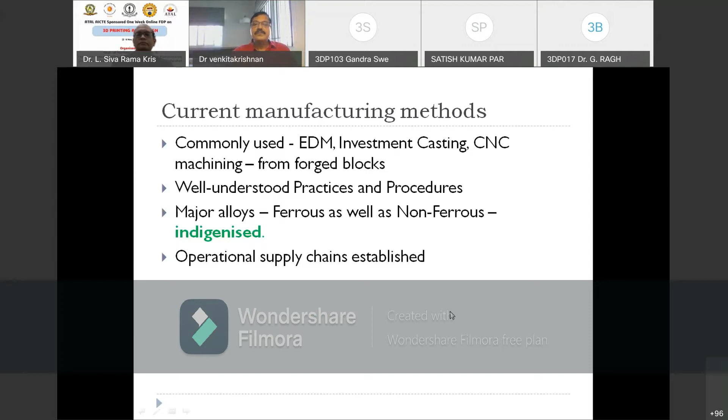3D printing as an alternative can work when it is cost effective without major redesign in an existing well-proven space system. But at the end of the one full day 3D printing workshop, none of them promised me that. I have given the purchase orders and asked what is the end-to-end product cost, what is the forge block cost, what is the machining cost, what is the surface treatment cost, what is the heat treatment cost. I have given them the sum total of all of that.

At the end of the day, the total cumulative cost of one component if you want to replace by 3D printing with imported powder from outside, all put together, and if I want 15 numbers since my launches are only 15 PSLV per year - none of the components repeat in space systems, you must know all of them are unique, only rivets and fasteners repeat - if those 15 components per year are to be made through this route replacing the existing cost-effective method, it must give me a cost advantage or a schedule advantage.

If both are not there, it doesn't become attractive or lucrative for me. So that they were not able to give me. They very clearly told me it is going to be more costly, sir.

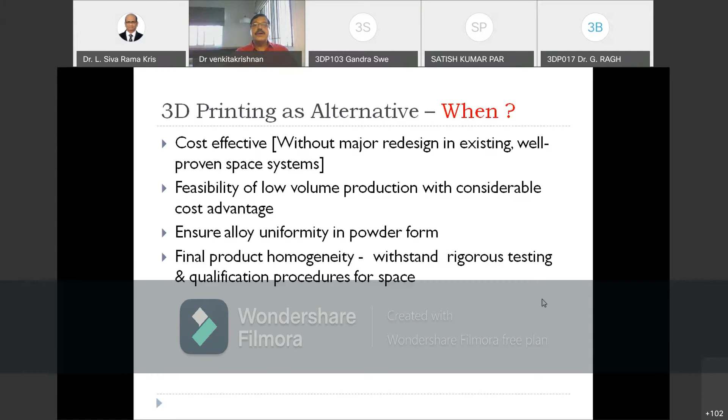Hope it is clear to you. Clear, sir. Yeah, one minute.

So there was a 3D printing summit. The kind of approach we made was the 3D Printing Summit 2018 in collaboration with the Additive Manufacturing Society of India, AMSI, a platform to bridge the gap between required end users, ISRO centers, and solution providers. 3D printing industries met together, shared the platform, and we exchanged our ideas, with participation from all major centers. So whatever is coming out here was discussed that time also, it is just coming to a different audience now. Presentations from select industries were also made.

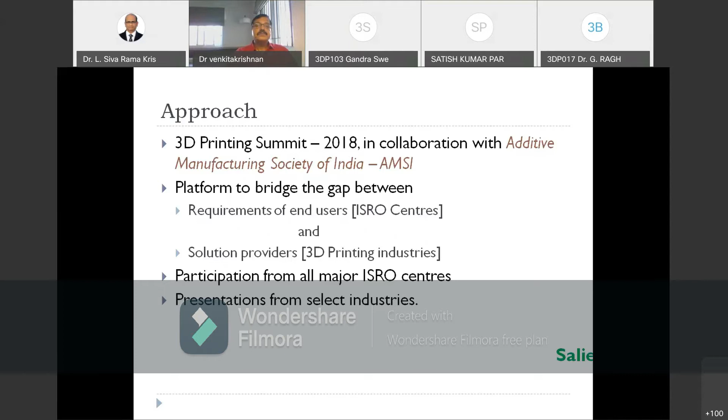This is going to be designed now. What is going to be designed? We thought we'll design for additive manufacturing - also, I am saying it is additive manufacturing also, not additive manufacturing alone. Because if at the end of the day you are proving that the existing methodology of manufacturing is going to be cheaper than 3D printing, we'll stick back to our process only, we will not go into 3D printing. But we have combined some components to make the joints less and more amenable for 3D printing. That way we are manufacturing to see that easy migration to 3D printing is possible.

And we are going to get the quotation for the same components through the existing methods also. We will see how both look like, and only then will we be able to take a call, at the end of the day, on whether we want to go for 3D printing or not. But the exercise is on - unless you do this exercise, I can't give a concrete answer on whether I want to go for this.

Two things are there. One is, whatever is said and done, whether ISRO is using it, or the country is using it, or we are using it, the world is moving towards 3D printing. So at some time, all components will be manufactured through 3D printing only. This is going to be a disruptive technology in the years to come, definitely, I'm telling you.

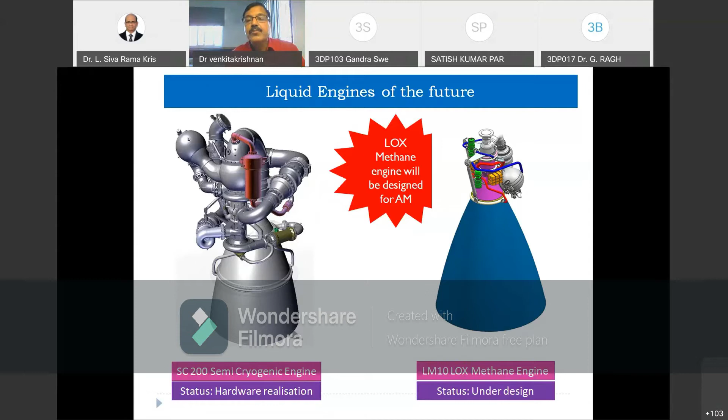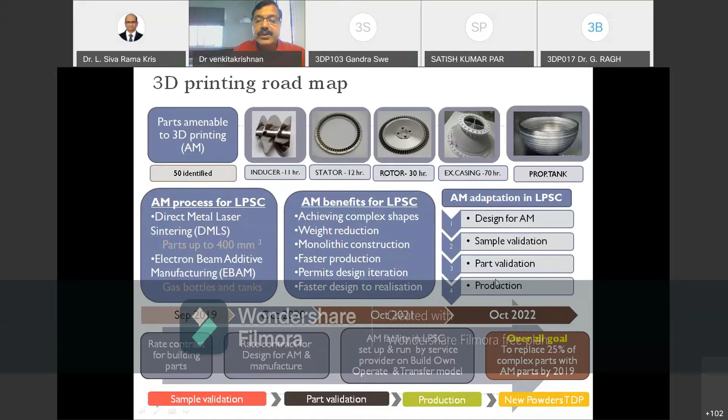One important thing to understand is that migrating to 3D printing for Rolls-Royce engine parts, component parts, or any kind of NASA or ESA parts we see right now - that effort started around 7 to 8 years back. So it's not an overnight changing over to 3D printing. They started 7 or 8 years back, but we are going to start right now only. Hence we will be saving some time because we have the knowledge of what these people have already done, and the kind of literature survey, everything - we have some more knowledge. It may not take 7 years for us; it may take 3 or 4 years from right now. That is the one advantage we are going to get.

But others have already migrated - we are still to migrate. And 3D printing, as I told some time back, is going to be the technology. We have no other option; we have to migrate at some point, if not now, then later. It's aimed to reduce time and cost involved in building rocket engine parts through additive manufacturing. That is the idea. That is the aim.

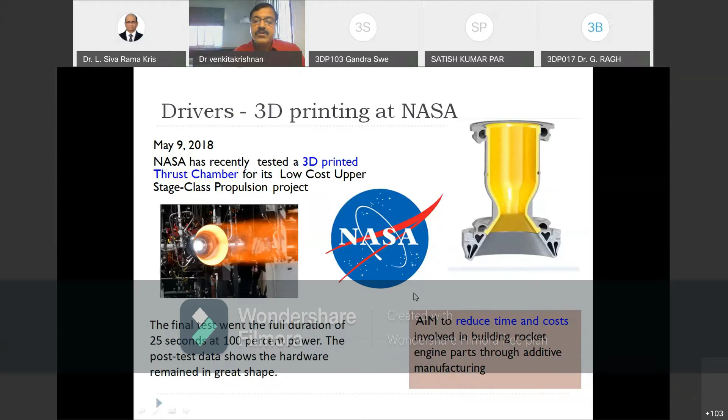For a quarter of the cost of import. You must understand, a quarter of the cost of import, and a product slightly superior to what we are importing. So you must understand the kind of expertise available in the country if you are really able to focus on that. This is a copper, chromium, zirconium, titanium tertiary alloy, which has a high thermal diffusivity. That's why it is being used, because it should not get heated up and melt.

It's the inner chamber. It has 525 convergent helical channels that are milled. That milling alone, if it's a monolithic product, all-welded construction, if somewhere something goes wrong, the entire product gets rejected, even in milling or in welding or brazing. And we have 7 brazing alloys in that with different melting temperatures. You must understand, each one is brazed in a different stage. The last one, if it is brazing, the first one should not melt. So the brazing alloy temperature should be less than that of the already brazed joint. So brazing alloys are to be developed with melting temperatures lower than the previous brazed part.

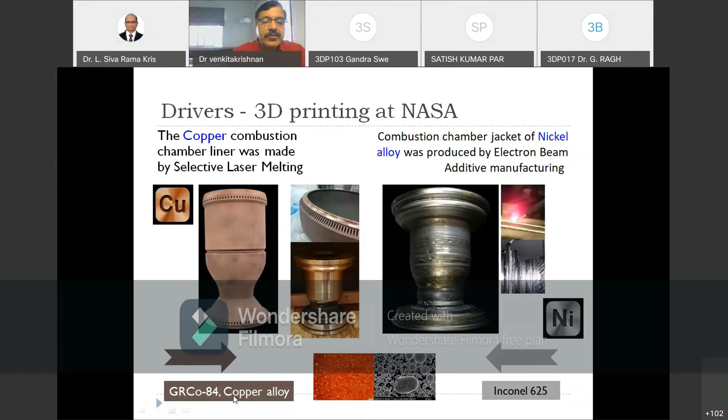Copper combustion chamber liner was made out of selective laser melting for NASA. Combustion chamber jacket of nickel alloy, a super alloy, produced from electron beam manufacturing, and that is Inconel 625, and GRCo84 copper alloy. They have got different copper alloys for this particular thing, and we have got different copper alloys.

The LPSC scenario compared to this is development of a composite thrust chamber for a 20-ton LOX engine that will be a semi-cryo engine as well as the next generation. This eco-friendly LOX methane engine is going to be eco-friendly. It won't contaminate the unburned or unused fuel won't contaminate the sea or anything, even the atmosphere.

The double wall construction has internal copper, whatever we have developed right now, and the outer chamber is 321 steel. 300 helical channels are going to be milled.

The advantage of 3D printing is avoiding milling of the helical channels. You can print it, you don't have to mill it, and it will be more uniform. It also avoids brazing, so the rotary vacuum brazing furnace is not required. And there's a reduction in number of parts also. We can integrate a number of parts because there's no separate outer chamber and inner chamber. If you put it together, it can become a single chamber with a sandwich construction.

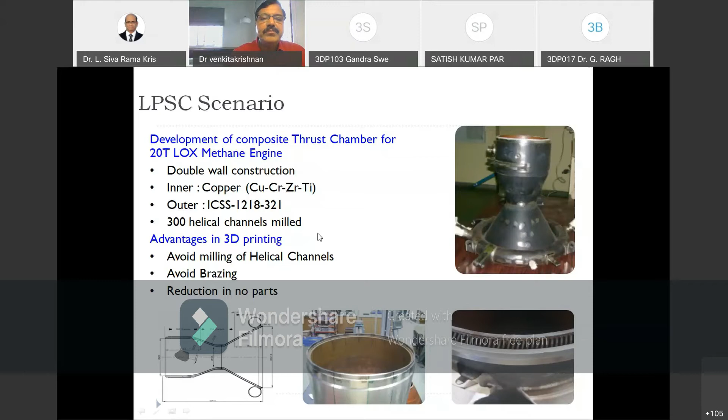The configuration, you have to see it in mind if you really want to follow my lecture. It's a nozzle, convergent-divergent nozzle, with inner and outer chamber. The inner chamber is made of copper.

Both inner and outer chambers are put together, and the combustion products are regeneratively cooled by passing through these channels. When the combustion products come out, the next hydrogen gets heated up by passing regeneratively through the walls of this chamber, so that it becomes preheated. So we are using even the products of combustion efficiently for preheating the next fuel.

In conventional production, 8,000 cross holes are to be drilled. In the LPSC scenario, 3D printing, and Ariane 3D printing—they are doing this right now in Europe, similar to what NASA is doing, and the equivalent is happening in LPSC Trivandrum. If you look at the ESA scenario, European Space Agency's Ariane, conventional production requires 8,000 cross holes to be drilled in copper sleeves, precisely screwed to 122 injector elements.

The injector elements are screwed to 122 elements here—this is called the injector head. It comes through the top of the combustion chamber, and the products of combustion are atomized and burnt there.

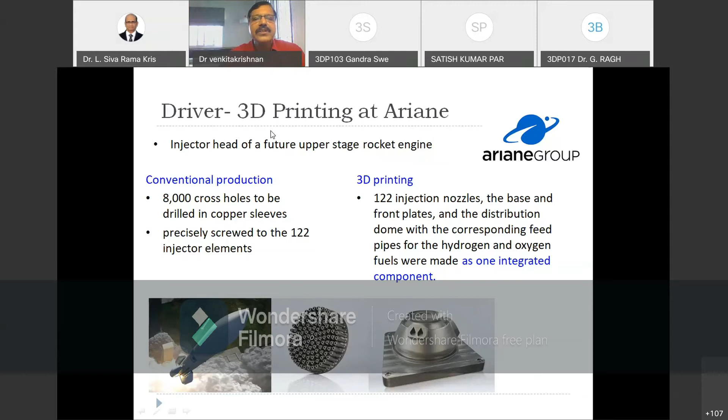3D printing covers 122 injection nozzles, base and front plates. So instead of making each individually and screwing them together, the entire thing becomes a monolithic component, 3D printed right now in the Ariane engine. We have been following exactly what they're doing.

Components cut from 248 to 1—you must understand this. 248 components, because space has a different way of doing things. There's traceability; you need to have a history card available for each component, and each has to be traced separately. Each has an inspection report, a snag report, and there's a non-conformance board available for each non-conformance.

The board has to meet, and the minutes have to be maintained for everything. So 248 components mean 248 reports will be there. You must understand that report making and documentation is equally important in space, and that is a very, very cumbersome affair.

So if you reduce 248 to 1, you need only one report. There's a tangible and intangible benefit when your number of production parts comes down. Your archival history, your volume of archiving, everything comes down, and your history tracing becomes easier.

Conventional production—casting and machining—takes 3 months. With 3D printing using lasers, the time taken will be very less. We don't know exactly how much, Ariane hasn't published that, but it must be less—otherwise they wouldn't go for it.

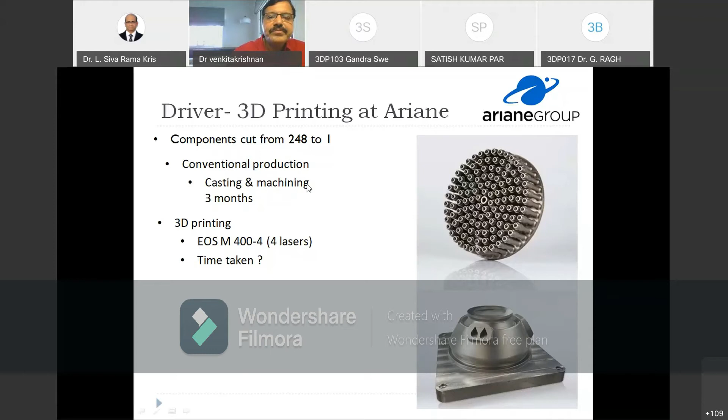In the LPSC scenario we are having, you must see this—these are all injector heads, all injector heads.

It is made by EDM process, electro discharge machining process. It is made of SS. This is an SS manifold, outside manifold internally, and you have braze foils in between this annular space.

You have braze foils here, and the entire thing goes for brazing together. Each one of these injector heads is water calibrated and the efficiency is measured. After that it goes back to the designer, who will reassign this component in the circle again to get maximum efficiency.

So each one, 169, it's only a typical one I have shown here. 169 elements are there actually; one of them is having 530 elements. These 169 you cannot put back again. If all of them are alike only, you can put them anywhere. It is not interchangeable, if it has a different value in water calibration.

Each one of these injector heads has to go for water calibration, come back after water calibration, and then the designer assigns a unique position for each head after the water calibration numbers are made available. So it has to go to a unique position, only then can you trace it. You must know it's a very laborious process. If you make a manual mistake of putting it somewhere else, the efficiency will be less.

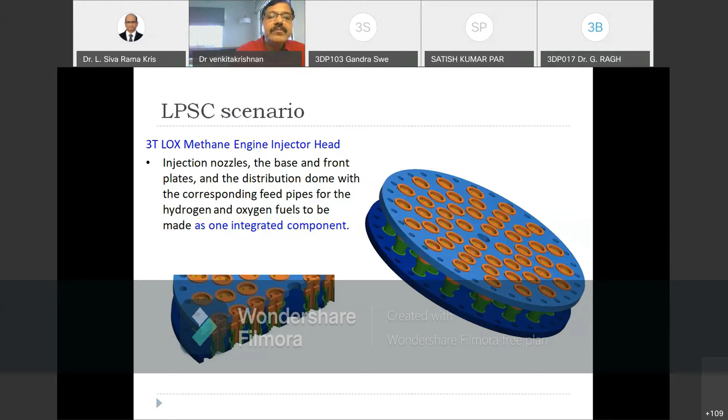At Ariane, what we are doing actually, Prometheus next generation rocket engine launches in 2030. You can see that it is 10 times less costly than the current rocket engine, Vulcain 2. GKN Aerospace Sweden will be developing the manufacturing for the full-scale turbine. They are going for all turbine parts, reducing the number from more than 100 to 2. The 3D printing will reduce the number from more than 100 to 2 numbers, all the turbine parts put together in the Prometheus engine. They are going to next generation engines, like what we are making in our methane engine next generation.

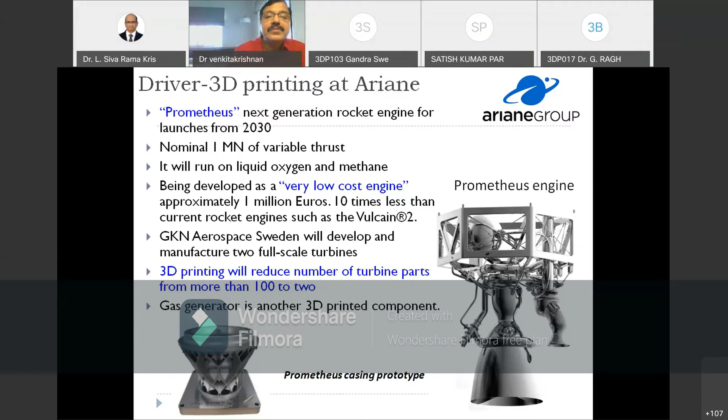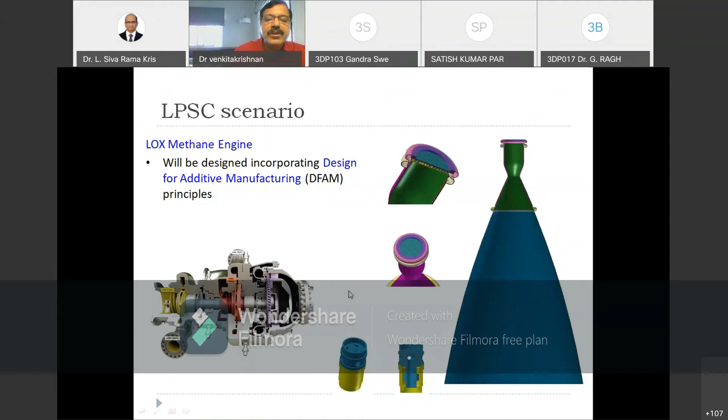The LPSC scenario actually is our methane engine. I'm just comparing here what we are doing right now in the same platform. Design for additive manufacturing, we are right now doing and comparing the parts, actually breaking down the parts, and it's going to be more cost effective to design for 3D printing. The existing engines we are not able to migrate only because they were not designed for 3D printing.

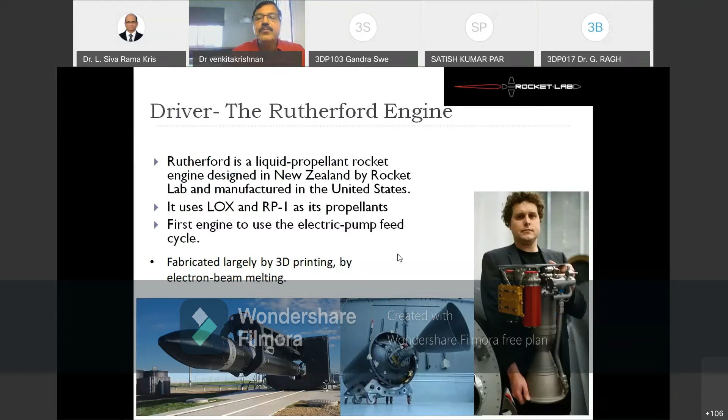The Rutherford engine, a liquid propulsion rocket engine designed in New Zealand by Rocket Lab, is manufactured in the United States. You can see it's fabricated by 3D printing, electron beam melting. This is made by electron beam melting actually. Another slide on the Rutherford engine combustion chamber. Time taken we are not knowing, but there is a considerable time advantage for this, we are told. So the same thing we are following here also.

The engine can be made by 3D printing in 3 days. You must understand, an engine of this complexity, if it can be made in 3 days, there's nothing like that.

The future is going to be like Ola or Uber. We are going to make one SSLV. You are hearing from newspapers and all about small satellite launch vehicles, up to 500 kg. We are going to launch through that particular vehicle because even now for 500 kg or 400 kg we are using PSLV, which is going to be a waste for all of us, because PSLV started from 800 kg and now we have optimized it to 1,800 kg.

A 1,800 kg rocket, if you really want to use it for 800, 400 kg or 500 kg, it's going to be a lot of loss. You may not load much propellant, but the entire hardware, the inert mass, weight, everything unnecessarily is a loss actually. You can optimize it a little more if you want to really carry only 500 kg. So we are going for a different class of vehicle called SSLV right now.

SSLV can be launched in 3 days. The checkout systems go through a laptop, the interface and all these things go through a laptop. Your launch campaign will only be 3 days. If you order today, I want to launch day after tomorrow, we can launch it. That's almost like an Uber or Ola taxi stand. We are just asking for a launch, and you are just obliging that.

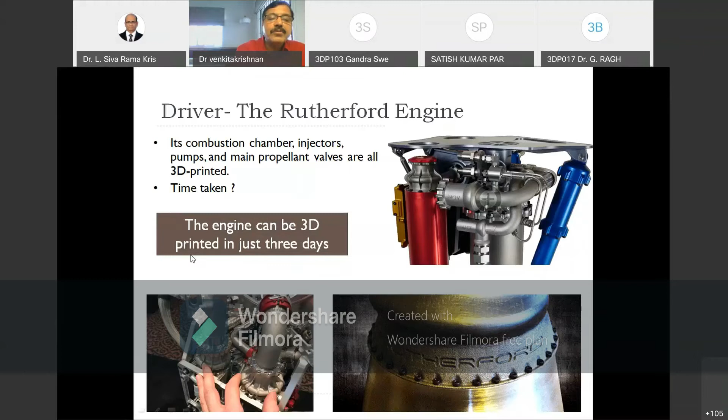Here also you can see the electric pump of the rocket engine will be designed incorporating design for additive manufacturing principles. So these components, a number of components you can see here, are going to be integrated into one.

Different alloys are going to come here, each color is a different alloy. This alloy, whatever we have shown, blue and blue are actually the same alloy. I'm explaining this because these alloys can be made through 3D printing into one integral piece, migrating from one alloy to another alloy. You need not go for separate component production here.

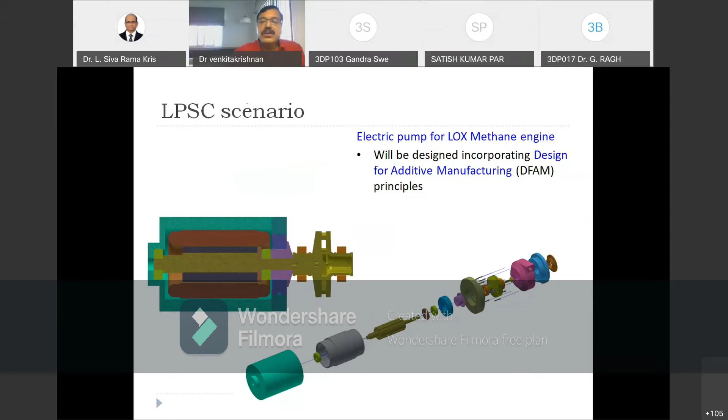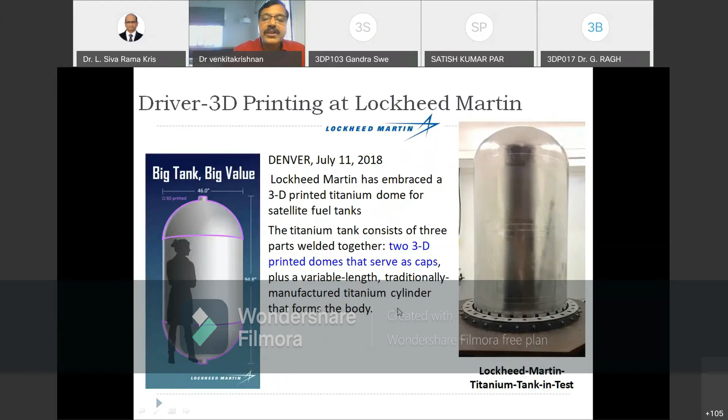Here also a lot of cost advantage and time advantage is there. In this scenario, you have propellant tanks in satellites as well as in rocket engines. Both have a cylindrical section in the middle and domes at the ends, like a hemispherical shell.

This hemispherical shell is made by winding a wire actually. A thin wire of titanium is wound into this shape and is fused and melted through electron beam welding additive manufacturing. This is one technology they have demonstrated here. And this is one where we are trying to make titanium satellite tank domes at LPSC Bangalore.

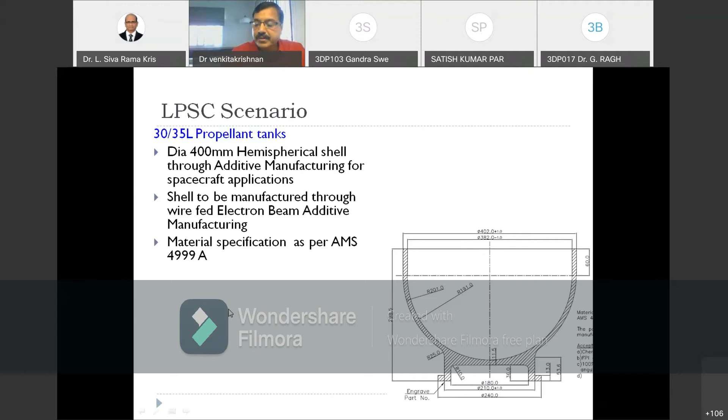You can see 3D printing, the pathway of progress at LPSC, which is the one center where we are mainly making 3D printing efforts. Additive manufacturing journey, you can see: adaptation, technology presentation, AM workshops, printing. We have an elaborate process of migrating.

We can't just do it like that. We make a very, very thorough economic analysis, and also check how strong we are technically.

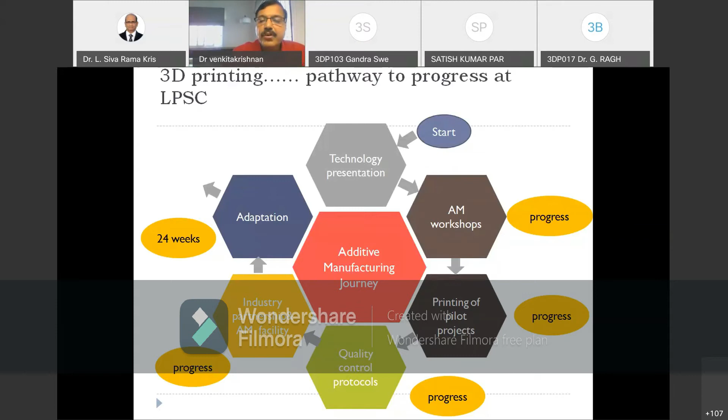So another area where we really have a gap is this: one forged block. If you really want to qualify it, you have to take a small strip as your test coupon, a UTM test coupon, in longitudinal direction, long transverse direction, and short transverse direction, and pull it and see. And you need to do hardness tests and everything. Once it's qualified, any component made out of that block, even 500 components, this one test coupon will qualify all of them.

But independently in 3D printing, if you make 500 components, how do you qualify like that? Just one forged block qualification qualifies 500 products made out of it in the existing system - that's the kind of practice we follow. But right now, if you make each component separately, what kind of qualification applies? Unless you qualify the process itself, with all the process variables, it won't work.

So that's going to be a real challenge, migrating from product qualification to process qualification. Here, we depend more on process uniformity and process qualification than product qualification. That is a philosophical change for ISRO, and that's one thing I want to highlight here.

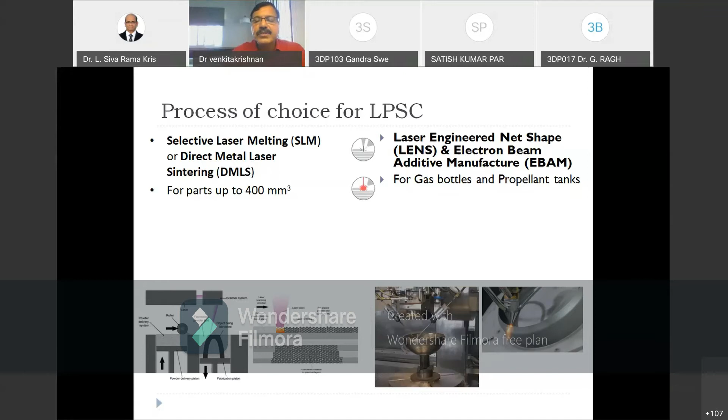So selective laser melting, or direct metal laser sintering process, parts up to 400 millimeter cube, we are going for that. And electron beam additive manufacturing for gas bottles and propellant tanks. These are the two technologies we have decided to go ahead with, with a minimum possible target of 25%, as I mentioned - by 2022, 25% of products will be replaced by 3D printing if it is economically viable. And for typical parts, 3D printing time - building time is 30 hours for a rotor, which was previously made using EDM, electrical discharge machining.

It takes almost 1.5 months in one EDM machine. Now it will be done in 30 hours. But we don't want that at this stage. Actually, we want only 12 numbers per year. That is another challenge - if you want 1,000 numbers made in no time, 30 hours is going to be really painful.

The question asked to me when I present this proposal tomorrow is, why do you want this so fast? I don't want it this fast. That is another challenge I'm having. I want only one in a month.

So existing technology is enough for me, unless we get into more launches in the years to come. So we have to project a scenario where we are going to make more numbers in the future, futuristic - that is one thing.

Second, as I told some time back, if 3D printing is going to be the technology and all other technology is going to be wiped out, we should not be lagging behind in not having the technology. For that, we should be having the technology. At least some parts we have to continuously produce through 3D printing to stay alive in this area in the years to come, so that at the right point of time, if no other technology is available and we are forced to migrate, we should not lose time and should be able to migrate. So those are the two policies we are following.

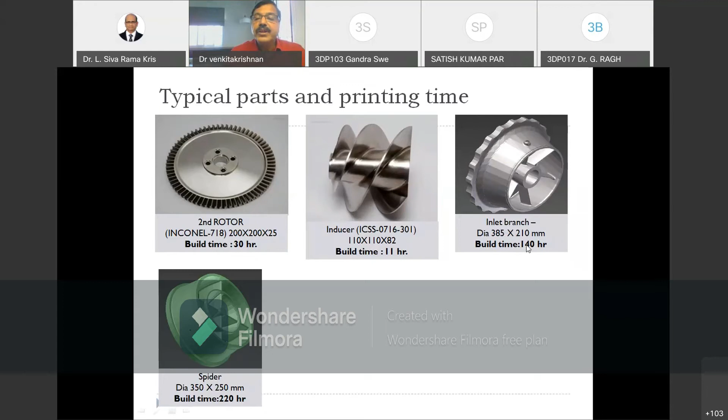The inlet branch time is 140 hours here. Spider is another 220 hours. This exhaust casing is done by investment casting as well as interface machining - I've seen this already. Now it will be done in 70 hours - that's the build-up time.

So this is a stator. This has an outer casing also - without the outer casing I showed something similar earlier. With the outer casing, if you want to EDM this, you have to flip it and do it through another cathode from the other side, a copper cathode.

So two copper cathodes are required - one from this side, since you can't make it through. You have to make it again and align it to the next side. If you want to flip it, again you have to align it properly. That is another technology actually, but we have mastered it right now and we are doing it.

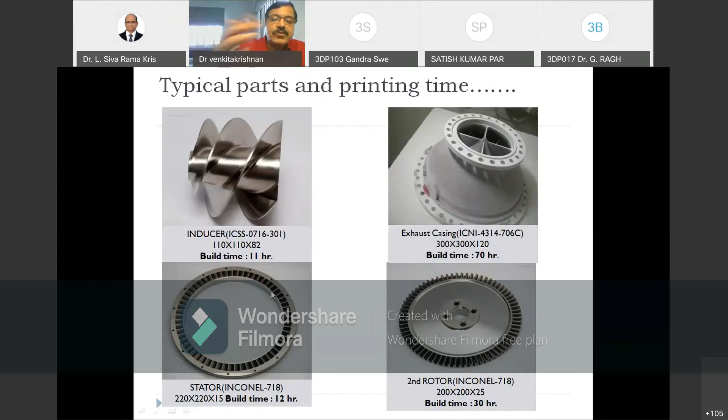But in 3D printing, you can do it without any problem of aligning cathodes from both sides and all these things. If it is open like this, you can approach from the side and do it faster. If it's closed like this, you have to approach from both sides - that is another thing we currently face, but we have mastered the technology.

Flow straightener, impeller - these are among the 50 typical products we identified which we are trying to migrate into 3D printing. The structural parts right now, like thrust frame support and thrust frame, whatever - these are all structural components. We can easily migrate these because they are functional parts with no flow, no pressure vessel, no rotation, no RPM. So these are static parts which we can easily migrate.

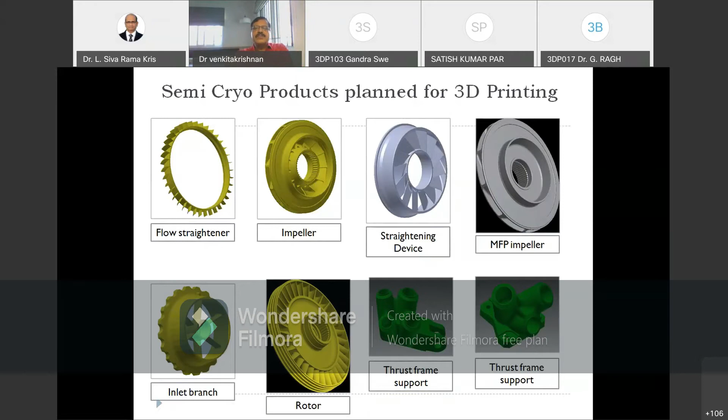These are typical investment castings. This is the second stage volute body for a cryogenic engine. ICSS means Indian Cryogenic Stage Steel - 1418-201-C - these are all made in Midhani, Hyderabad. This is investment casting with the interface area machined. The interior has highly intricate pockets internally, so all these things are easily amenable for 3D printing.

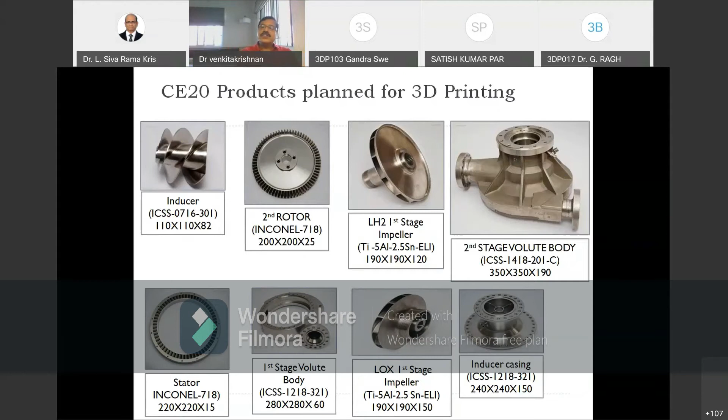You can see that here. Obstructing my view, actually. That's what. Okay.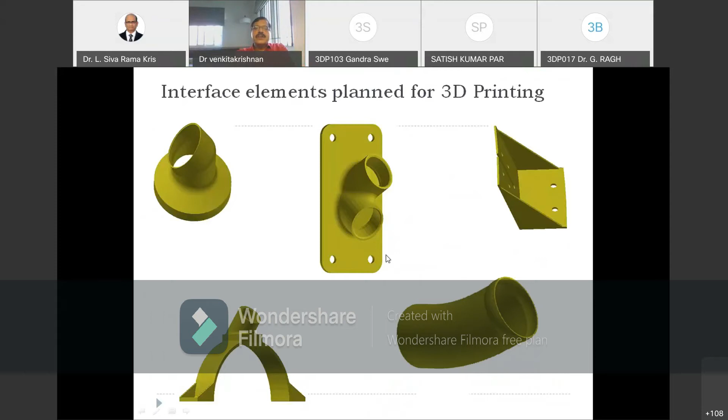These are all typical structural elements easily made for 3D printing. We already have 3D printing for this - it doesn't make sense otherwise. These are all sheet metal products flared and welded, so we are easily going for 3D printing right now. But engine component 3D printing will take more time, as I mentioned earlier.

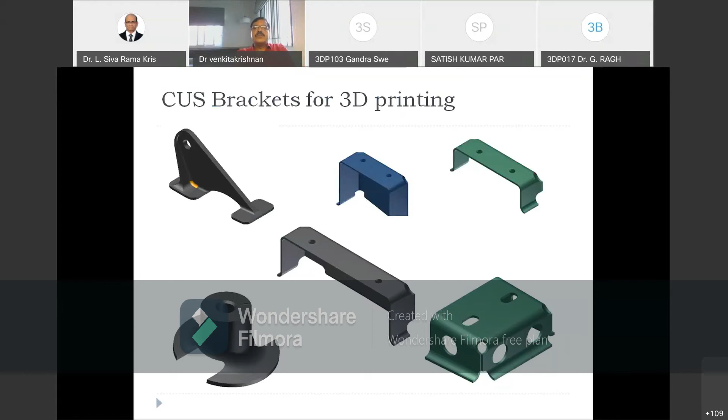CUS brackets for 3D printing. CUS - this is cryogenic upper stage - called CUS, cryogenic upper stage brackets for 3D printing. Semi-cryogenic engine 3D printed parts - typically what we are going for with 3D printing. These are all typical parts easily made for 3D printing. Satellite thrusters - you can see satellite thrusters here.

New powder development is required for niobium - C108, columbium. Right now we are making it through NFC Hyderabad. We got a columbium plant, the niobium-columbium plant, just now introduced, indigenized two years back. And if you really want to make a new powder development for 108, it's going to take another 10 years.

This withstands 1,800 degrees centigrade, and it's a highly thermal resistant material. Thermal barrier coating is not required inside this. It's called columbium and niobium.

And if you really want to make powder for this alloy and don't want to import it, it's going to take another 10 years from now. So this technology sometimes, if it involves all exotic alloys, sets me back by 10 years. You must understand - sometimes it sets me back by 10 years more.

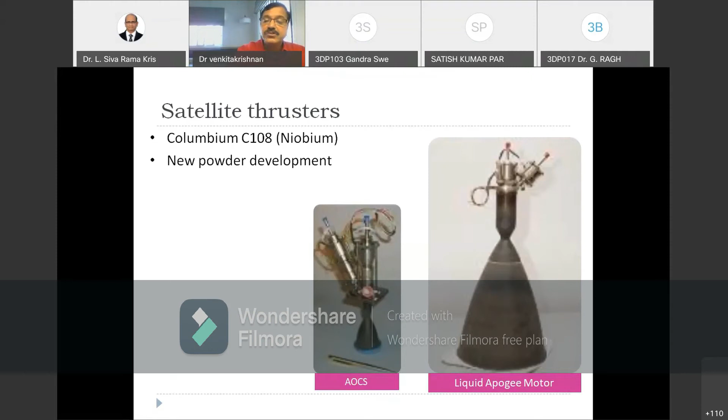If you're really talking about Atmanirbhar Bharat, self-reliance - if you're importing, of course not. But we have been importing for quite a long time. Atmanirbhar and self-reliance - ISRO actually started this long back, before all these words were coined. 10, 15 years back we have been working for self-reliance without anybody's encouragement. It's now become policy, because with high-end technology, at any point people may say tomorrow I won't give it. So it should not come to a standstill, and your technology should not be taken for a ride. You should be able to launch your satellites and rockets regardless. So you must be Atmanirbhar or self-reliant, even at a higher cost. That has been ISRO's policy over the past so many years.

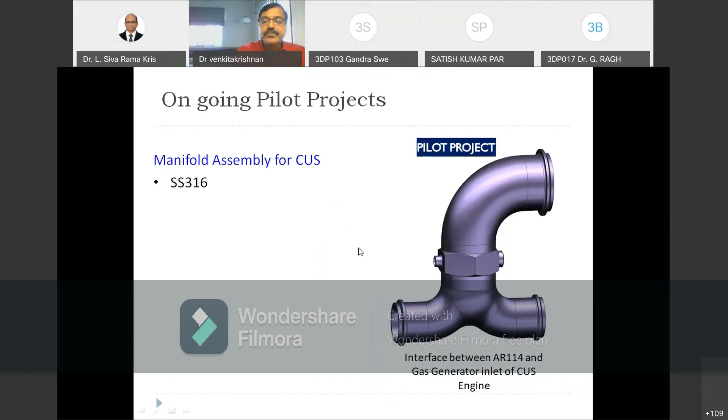Manifold assembly - this is another 3D printing pilot project already done through Wipro. Semi-cryogenic, uses Inconel 718, a highly hard super alloy. This also we have made as a pilot ongoing project.

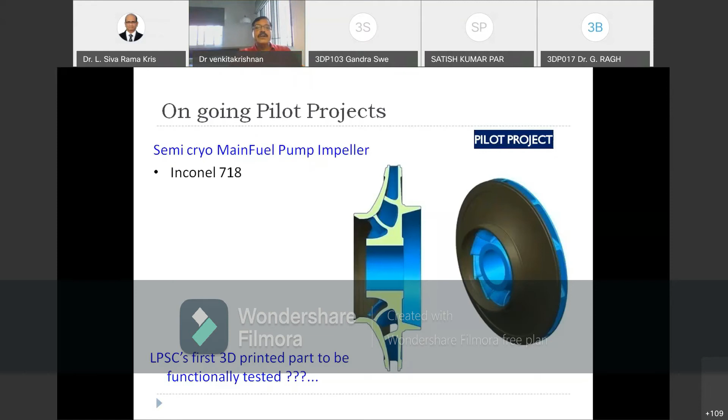The alloy comes from KMML, titanium sponge comes from Kerala Minerals and Metals, from beach sand. Titanium dioxide - they reduce the beach sand to titanium sponge. Titanium sponge goes to Midhani and they convert it to Ti-6Al-4V, making the alloy. After that it goes to Visakhapatnam, to BHPV - earlier BHPV, now BHEL has taken over.

The plate is given there, and it's made into a kind of semi-dome through dome processing. The dome comes again to Trivandrum for BrahMos, for dome machining. Then the entire thing goes to BHEL Ranipet for making the tank. For electron beam welding, it comes again to Bangalore LPSC. Then pressure testing goes to Trivandrum and Mahendragiri. So this is how a tank is being made right now.

The entire South India, almost from Visakhapatnam to Bombay - or if it's not the plate route, for the forge route it goes to Bharat Forge, Pune. So the entire southern India, below the Vindhyas, is involved in making just a small tank.

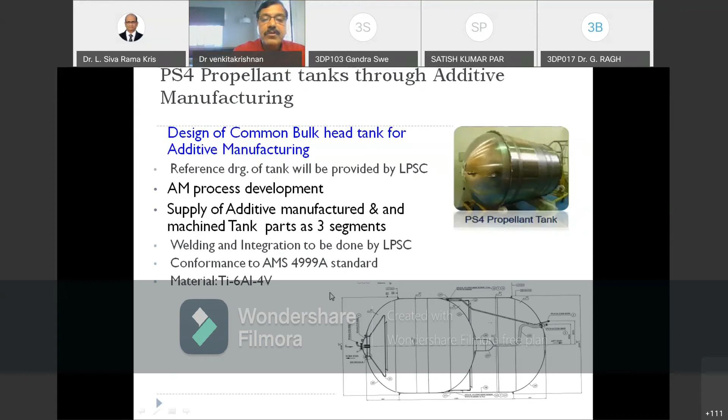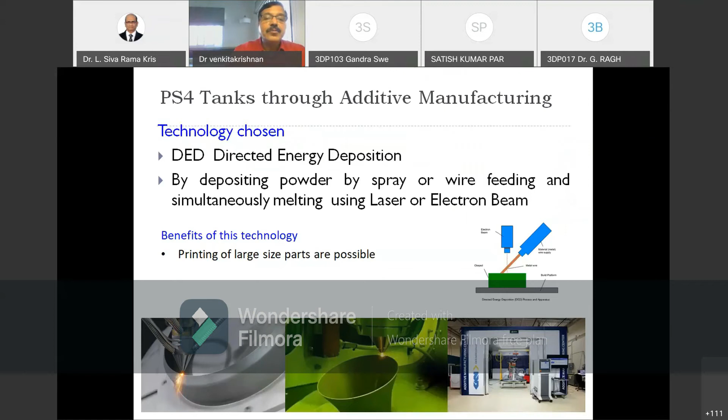That is one important challenge which we are posing for all people working in the 3D printing area, if you really want to contribute to the space segment. PS4 tanks through additive manufacturing. Actually, directed energy deposition method is one method we are really going to follow. And powder development for the future.

So these many powders are to be developed, minimum, if you want to make columbium C108, copper alloy, CU nickel alloy, C273 titanium alloy BT5, TI6Al4V, TA 2.5 and 2. That also alpha alloy, also alpha beta alloy, also you have to make. Nickel alloys - these are all Russian alloys actually. Stainless steel, 321, 304, 316L.

Everything we have to make right now, space quality. That all - space quality, you must understand, these are not commercial quality. Space quality means the oxygen content will be less, the gas content will be less, the porosity will be less. All will be very strict. The AMS standard we are following for space is totally one order higher than the commercial products.

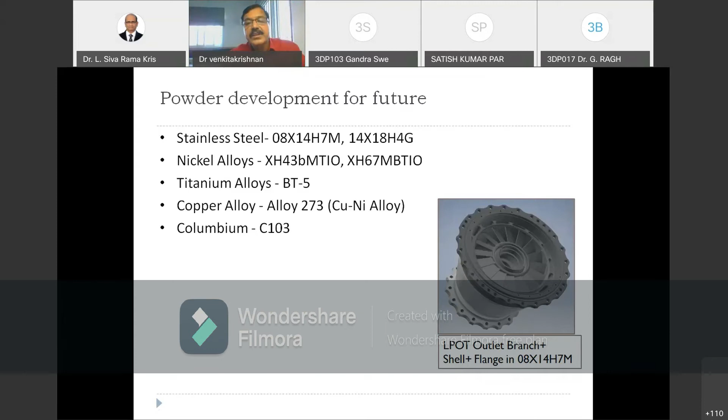Spacecraft component subsystems what we are following in SAC Ahmedabad, Satellite Application Center Ahmedabad. Some of the components we are 3D printing, I'm just sharing with you here. So materials like 6061, B51 SWP, 2024, magnesium alloys like AZ31B H24, 6Al4V, 300-400 series of steel, beryllium copper alloy, non-ferrous like FRP, fiber reinforced plastic, PTFE, and Delrin and nylon, etc. All can be 3D printed.

This center, you must understand, 90-95% of material is removed right now through CNC or wire EDM method. Right now, the way in which you produce, there's a lot of waste of material happening. To produce 10 grams of small components, we'll be wasting around at least 300 grams of forging to see that it is being made. The scrap cannot be used for anything else - it is a waste actually. The machines have to be 3-axis, 5-axis, and it's going to be highly costly.

So if you go for 3D printing, we can save a lot of material, that need to be cataloged and counted so that only then can we prove it is more economical.

Dimensional accuracies are generally 5 - you must understand even forged parts or even formed parts like sheet metal parts, we also require 5 micron, 50 micron accuracy. Very difficult to get sheet metal accuracy for 5 microns, 10 microns. We are looking for that. And surface finish is 0.5 to 3.2 microns. This is another challenge which we are really posing for 3D printing.

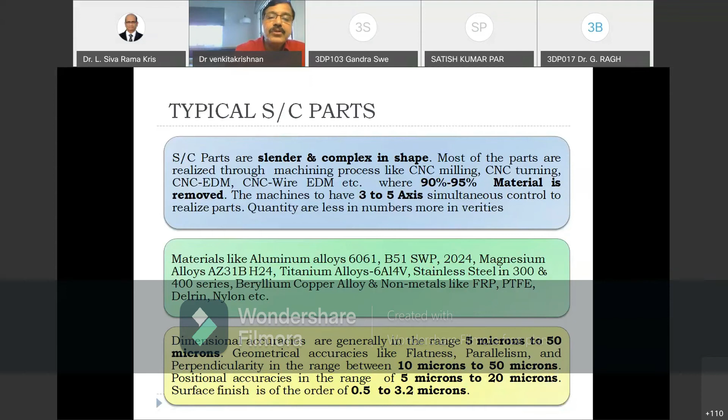So avoiding CNC machining in the final phase, if it is possible in 3D printing, and if you're able to get an accurate product by 3D printing alone, that is going to be really a kind of boost for me. Otherwise, no, the CNC machining I'm not able to avoid. So these are the things which you really look into when you want to create this. Final machining is still there.

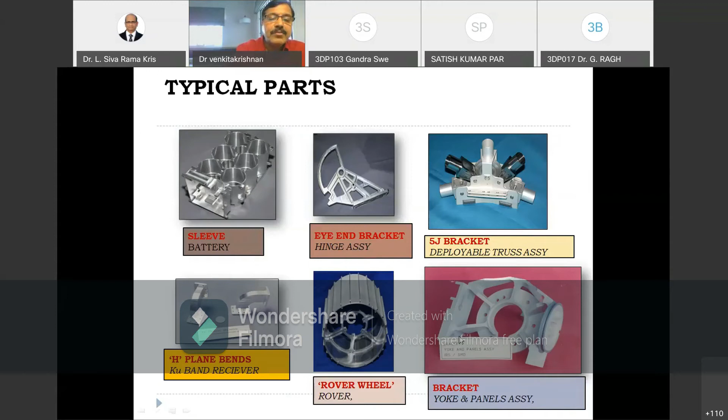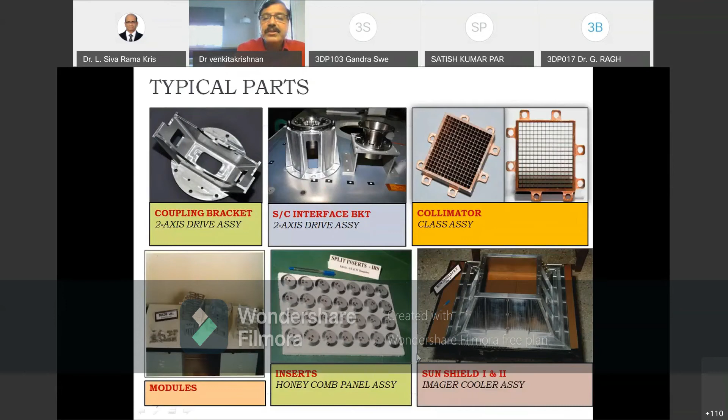Honeycomb panel assembly - these are typical parts. You can see here additive manufacturing from component rapid manufacturing and rapid prototyping from concept modeling has evolved into additive manufacturing right now as a technology.

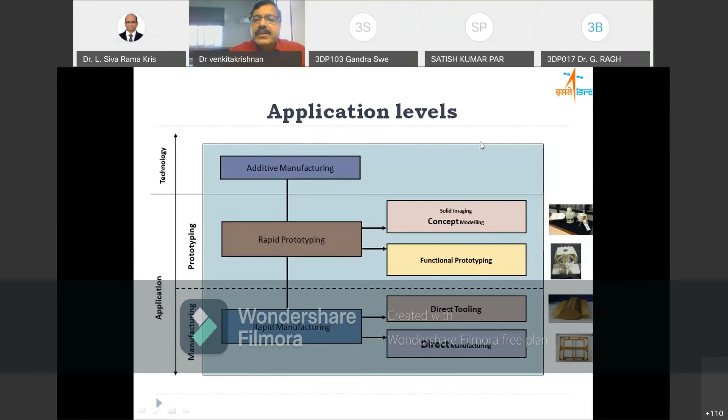This is not a new technology. Sometime back, Boolean algebra - if you want to construct solid geometry from circles and other shapes, that's a kind of additive, and the other one is subtractive. What we are really doing is subtractive. So the reference taken is totally different, even in the machine. The entire thing is a totally different product - even design concepts are different, in your FEM analysis, everything.

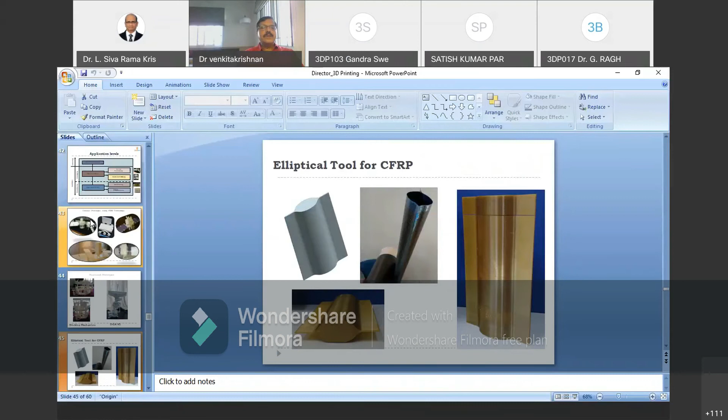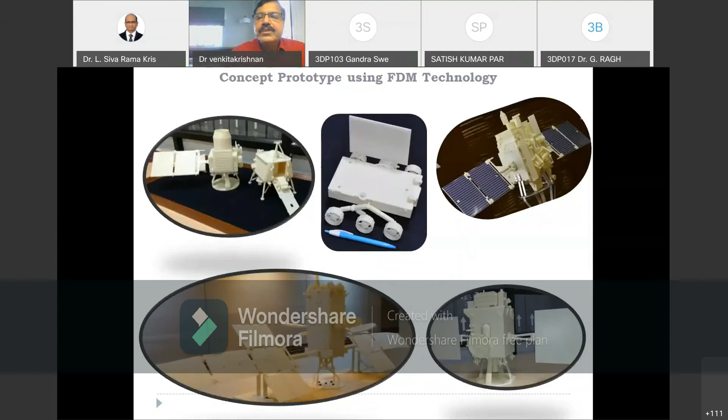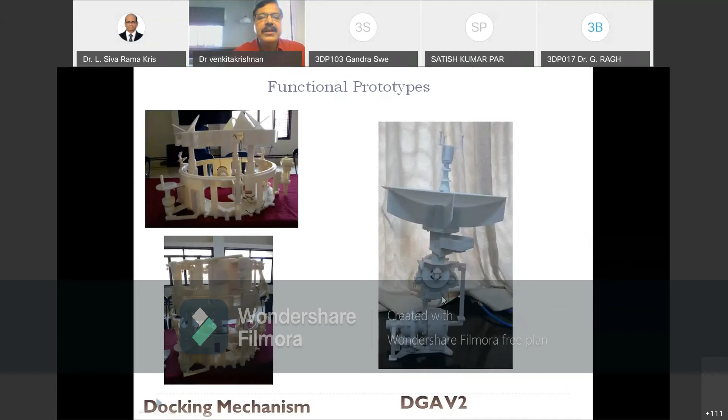Concept prototype using fused deposition modelling technology. We are producing some components - these are also satellite components, and future functional prototypes right now. They're all again 3D printing functional prototypes by some other mechanism, then finally migrate to actual metal. What we really do here is prove the configuration first, and then go for the actual product.

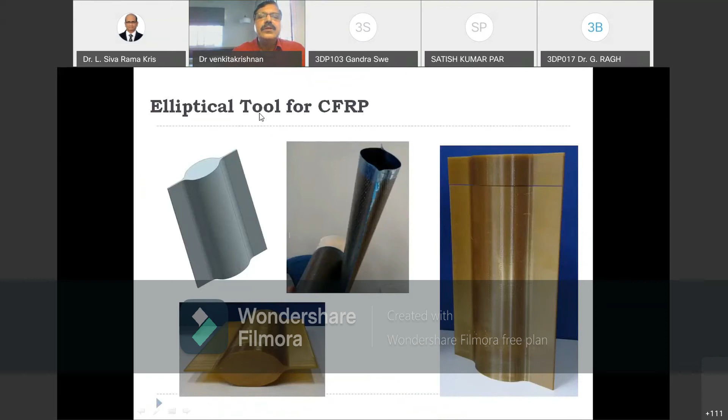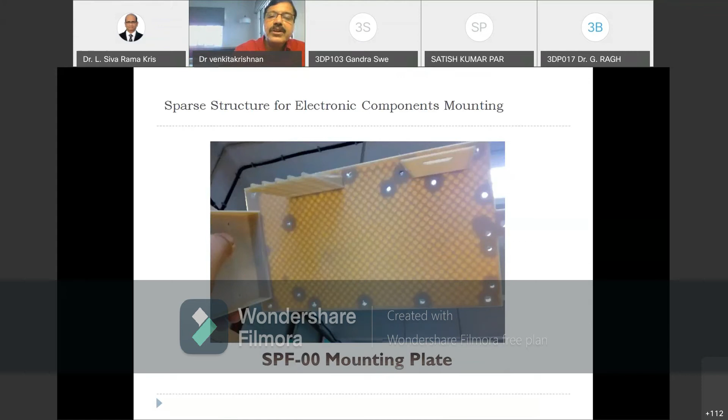Elliptical tool for CFRP components, SPF mounting plates for electronic components. This also can be 3D printed, otherwise you have to go for a big machine and machine it out. 3D printing is an option, but big machining is still required in some cases - the size of the machine is not going to come down. But you require a typical tailor-made 3D printing machine for this also.

AM for insulation using ULTEM thermoplastic material 9085. Here also we are using 3D printing, with some other non-metallic materials also. Validation of ULTEM has been completed by 3D printing already in SAC.

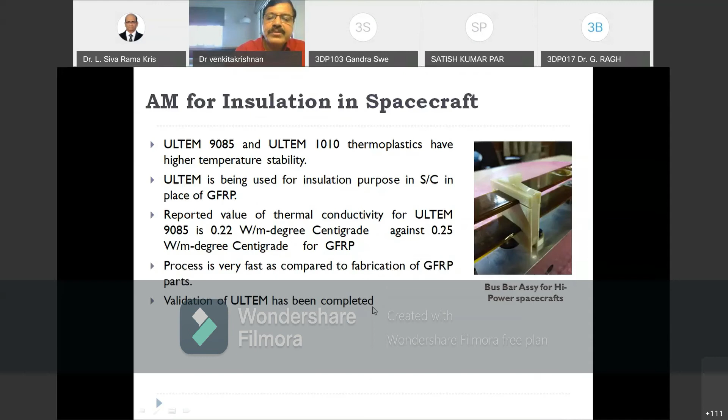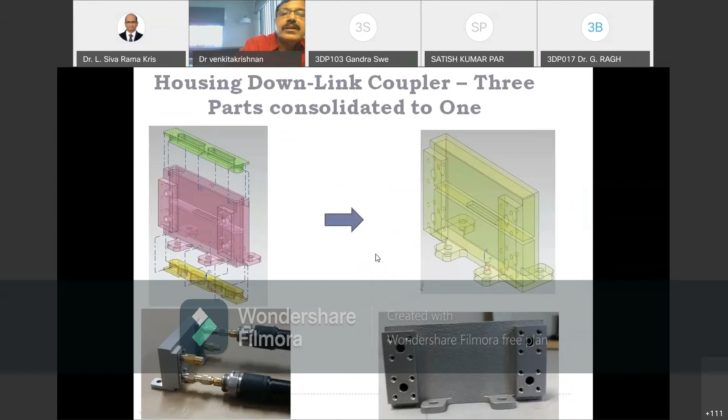Proposed payload is 17 parts consolidated to 2 parts. This is the advantage we are going to get - this is designed for AM. Housing down link coupler, 3 parts consolidated to 1.

Space payloads - communication payloads, navigation payload, remote sensing payload. Three types of payloads are there for three types of applications, including microwave remote sensing payloads. Here also we are finding some application of 3D printing.

The design approach versus fabrication. You can see the kind of mechanical design and fabrication done in short time with minimum weight, design intricacy, compact simple configuration, stiffness, strength, design for manufacturing, ease of fabrication, thermal management - all these are the other factors which don't come into play in other component manufacturing.

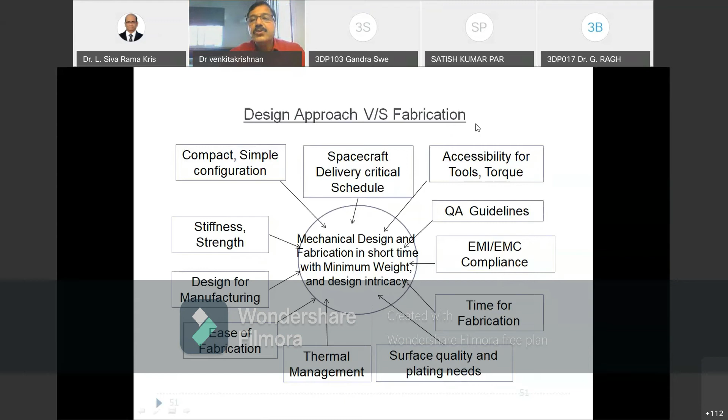Accessibility, tools, and torque - accessibility should be there, otherwise that's another design factor coming into picture. In the rocket, accessibility is very limited when components are placed alongside others, so torquing accessibility should be foreseen and the component made accordingly. Otherwise you'll end up in trouble when you really want to integrate the component.

Electro-optical payloads - you can see all these are 3D printed. Materials like invar, magnesium, titanium, and composites are also coming into picture. Tight geometric and dimensional tolerances are required, along with low alpha materials.

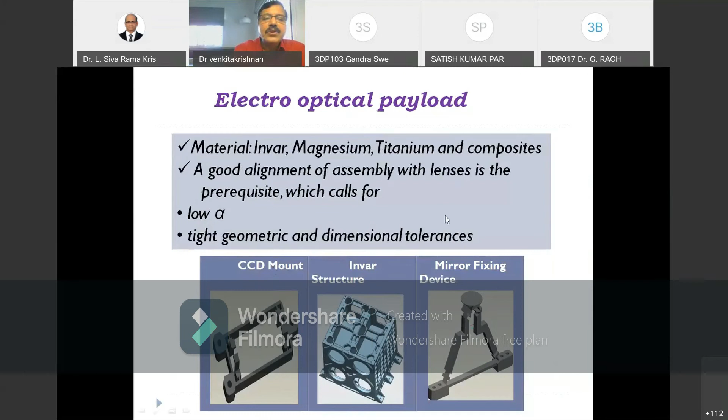Aluminium alloy machining through DMLS, using aluminium silicon powder, which is an imported powder. Indomim, one company in Bangalore, is making some of these alloys for us for 3D printing. For the prototype so far, they had to go for commercial scaling up.

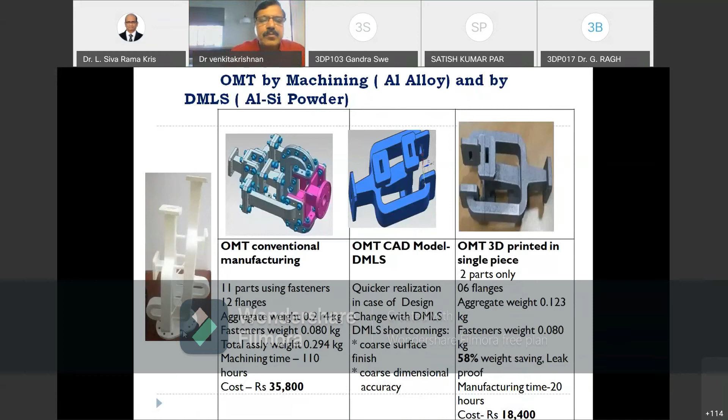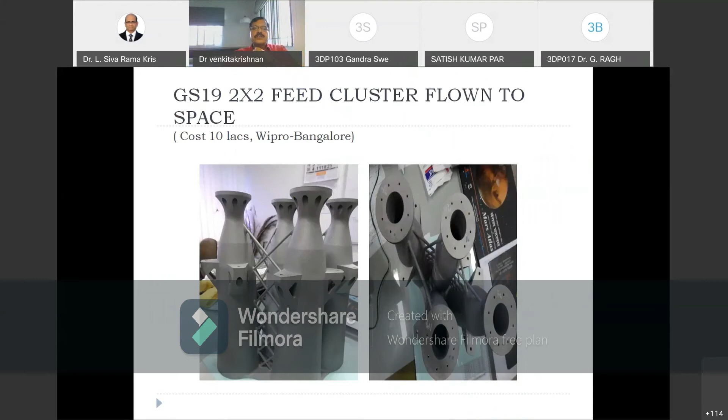DMLS printed parts, typical feed cluster flown to space, worth 10 lakhs - this is run by Wipro. It's already flown, with the cluster flown in our last GSAT satellite. The GSAT-19 feed structure has also already been assembled and printed as a single part, in aluminium-magnesium-silicon alloy.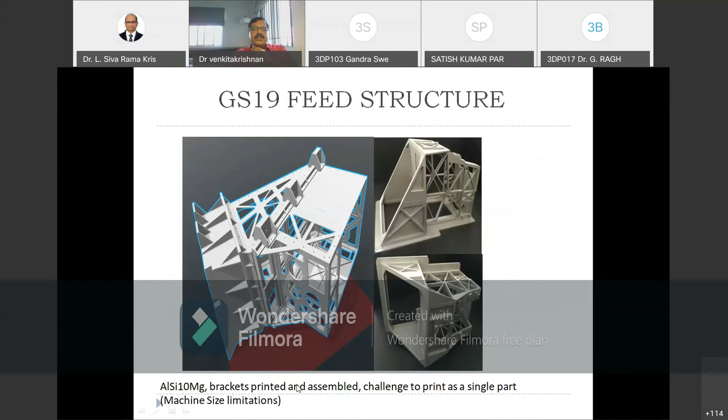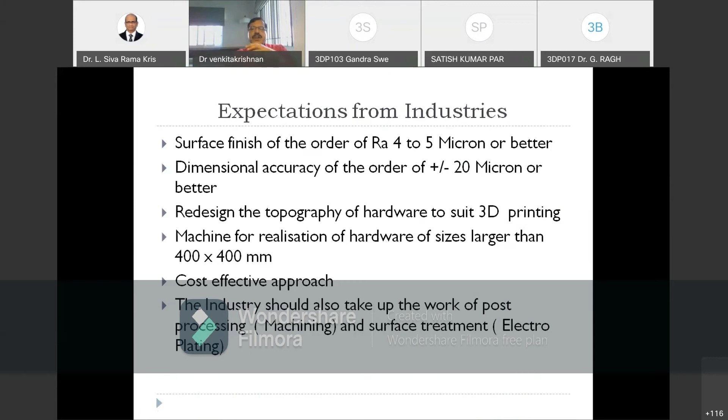So the expectation from industries: surface finish of the order of 4 to 5 microns or better is required, dimensional accuracy of the order of plus minus 20 microns or better, and redesign of the topography of hardware to suit 3D printing. We need machines for realization of hardware sizes larger than 400 mm, with a cost-effective approach. Industry should also take up work for post-processing machining and surface treatment like electroplating - we require anodizing and electroplating too. The entire end-to-end production needs to be taken up in the industry; we can't go piecemeal on this.

In conclusion, the learnings from the 1-day 3D summit and our experience so far in 3D printing for space components show that opportunities do exist in select areas. Replacing the operational space system with 3D printed components is not always optimal - parameters of cost, reliability, efficiency, etc. have to be seen case by case. Adoption of design-to-print, design-to-additive-manufacturing philosophy for next generation space systems is what we are going to follow.

Evolve a qualification procedure for 3D printed components. That's what I told you some time back, on how to qualify the components when you make 100 numbers from different builds. The process qualification is very important for us, not product qualification. If you make 100 components from one forged block, my qualification is very easy. One block qualification is easy enough for me to qualify 100 components.

So that is going to be a different system approach here. And powders and atomizers, all these are alloys. A few of them I have mentioned here. Many more are there, and they are to be made in India, and atomizers are to be available. A completely indigenous supply chain for the 3D printing domain, to avoid the pitfall of imports and to make it Atmanirbhar.

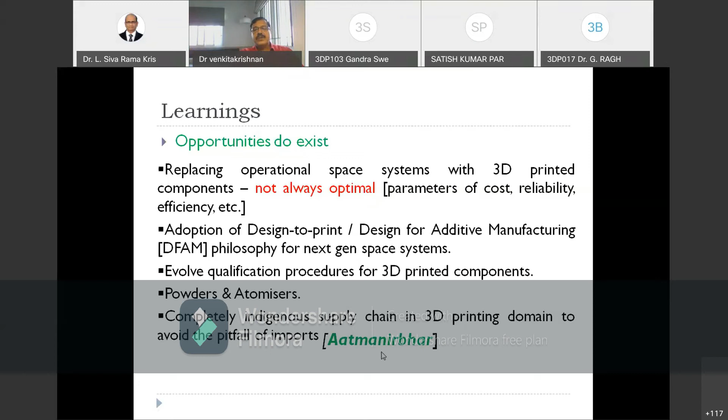Okay. So that is one challenge we are posing to all industries, all research scholars, and all people who are working in this area right now. And thank you for your patient listening. I feel I have conveyed exactly

through some of the slides here, a cross-section of slides, a flavor of what exactly is going on in the 3D printing area in ISRO, as well as what we are looking for, and what are the small bottlenecks we are facing to migrate to 3D printing at a faster pace. Thank you so much.

Thank you, sir. Wonderful insights on what ISRO is doing in 3D printing and what challenges you face in space applications. You also told that whenever a new technology comes, there will be a lot of hype. But we should understand and realize its potential and how to migrate from conventional to the new technology. Adopting it is a very challenging task. It cannot happen overnight, but only with proper understanding of the technology and its limitations. I think this FDP program has given a clear picture today of what 3D printing is, what its future is, and what the challenges are.

Now we have been given a lot of research areas, because this program is mainly for academic faculty members, and startup companies and other people who are very much into 3D printing are participating. Around 200 people from across India are participating online. I hope your keynote lecture has given an insight into what we have to do in future and what research areas we have to work on. As you have said, with an open hand, ISRO is ready to accept ideas from anyone. If you come out with proper solutions to the challenges you have thrown, ISRO is going to support that. And I hope it has given a lot of insights to all our participants.